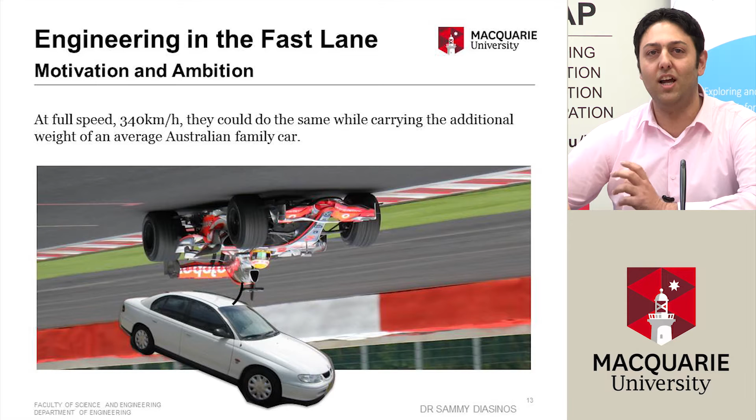I really love this aspect about Formula One, and I wanted to become part of it. From that point on, once I realized that was the case, my goal and all my focus in the future was: how do I get involved in designing Formula One cars? To do that, I needed to become an engineer, and that decision started as early on as high school.

Once I finished high school, I obviously decided to undertake engineering. I studied aerospace engineering because I thought that was most closely aligned with the goal I wanted to undertake. But I also chose a university not just based on the degree it could offer me, but also the extracurricular engineering projects it had available.

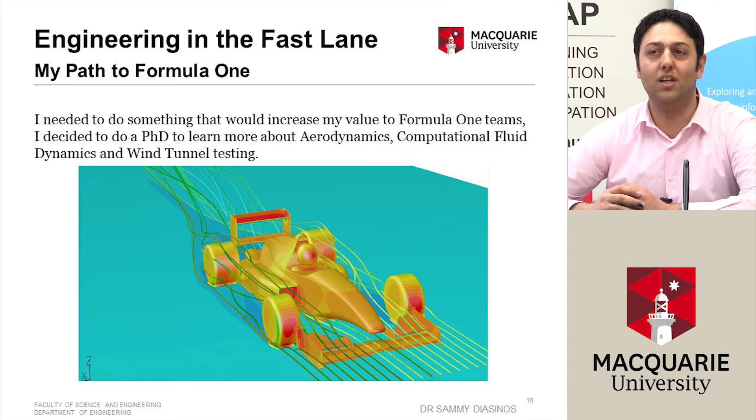So what would I study? A PhD requires you to solve a problem that hasn't been considered before. I found a problem relevant to Formula One cars: I investigated how the performance of a downforce-producing wing varies in the presence of a wheel, and I used CFD as well as wind tunnels to investigate this problem.

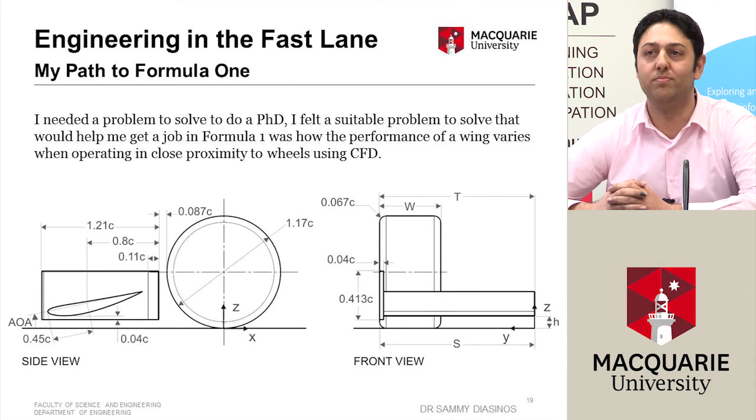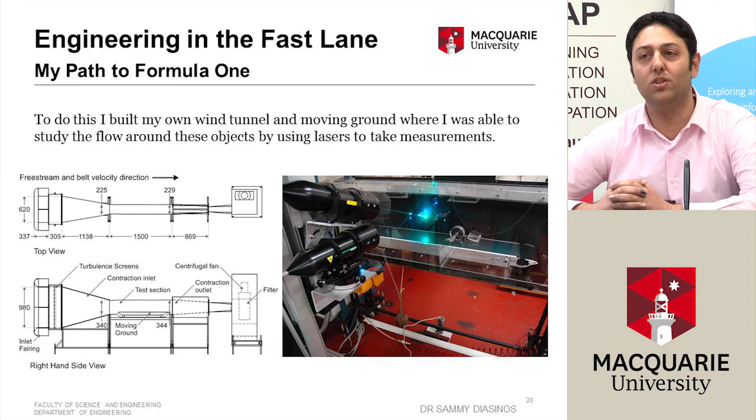Unfortunately, my university at the time didn't have a wind tunnel that would allow me to investigate the problem as I required, so I decided to build and design one. Here's a picture of the wind tunnel schematics that I created and the final product. We also used lasers to take measurements of the airflow behind the wing and the wheel, so we could understand how the flow structures vary around them.

Some of the results here summarize how these flow structures varied. I was the first person able to understand why previous people who studied the same problem were getting different results depending on the geometry they were testing. I found that the span, the amount of overlap the wing had across the wheel, was a significant factor for why all my predecessors were finding different or conflicting results.

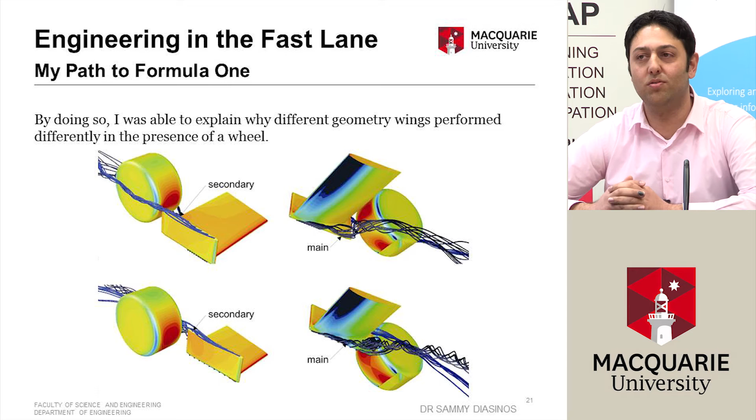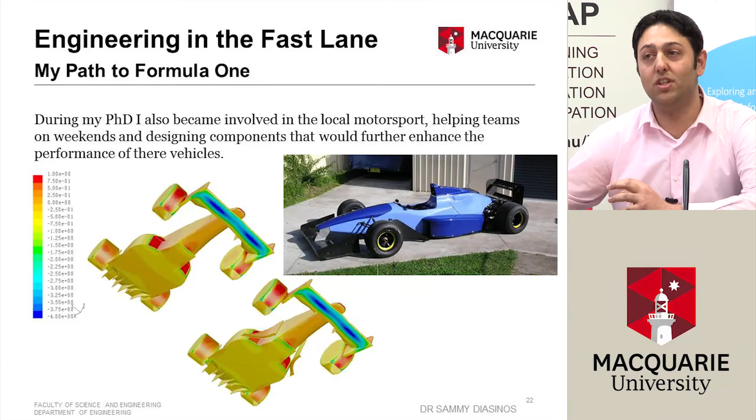During the same time, I also took the opportunity to work with some local motor racing teams, including a Formula 4000 team, very similar cars to Formula 1. I offered my services for free just so I could get experience and understand how to better prepare myself for Formula 1. One of the things I did was design some barge boards, look at how they could improve the performance of the cars, then build them and mount them onto the car for testing on track.

The other fantastic thing about working with the local motor racing industry was it started to generate contacts that could introduce me to people in Formula 1, which was very valuable. I used those contacts to try and convince the Formula 1 teams overseas to collaborate with me and support my research. Unfortunately this was unsuccessful because Formula 1 teams are very secretive—they hold their intellectual property with great value, so that wasn't something they were willing to share with me.

Instead, they invited me to visit them the next time I was in Europe, whenever I had a European passport. Once I had that invitation, I didn't wait—I made plans to go to Europe. In 2004, after obtaining a Greek passport thanks to my Greek heritage, my parents being from Greece, I arranged trips to Europe and visited many motorsport teams, including the Honda and Toyota Formula 1 teams.

I then returned home and continued working on my PhD, and even at this point I felt my dream would never happen. But I kept my contacts overseas up to date with my progress, staying in touch so they knew what I was up to and what stage I was at.

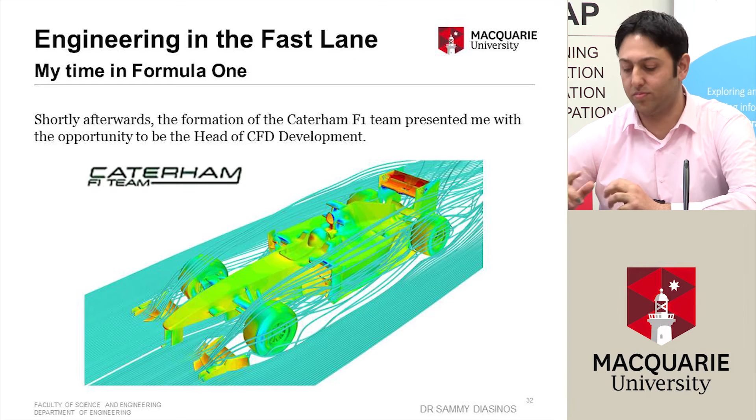Shortly after that, I was scouted to join the Caterham Formula 1 team, which at the time was Lotus, as their head of CFD development. That meant I was responsible for all staff using CFD as a development tool. I was also given the role of Wind Tunnel Special Projects Group leader, investigating problems more complex than just refining the aerodynamics of the car. These included things like the blown exhaust, which impacted both aerodynamics and engine performance, so we had to liaise with the engine department from Renault and the full-scale department, which had to implement the exhaust system safely. It was a very eye-opening and entertaining role.

At all three teams I worked at, a various number of people were used to design, build, and race two cars. At Toyota, it was approximately 1,000 people. At Williams, about 450. At Caterham, the smallest team I worked at, probably no more than 350. But why are so many engineers required to do this, and what could we possibly do all day? There's only two cars racing around the tracks - how much work is there possibly to do?

The reason there's so much work in designing a Formula One car is because every single component is unique to that car and suits its special requirements. As a result, every component is analyzed and refined to achieve the highest performance possible in the time we have. Every component is frequently redesigned and progressively improved to enhance the car's performance at subsequent rounds. This happens non-stop every day of the year, regardless of when races are held, and as a result, the car that starts the season is very unlike the car that finishes it - they almost have no resemblance to each other at all.

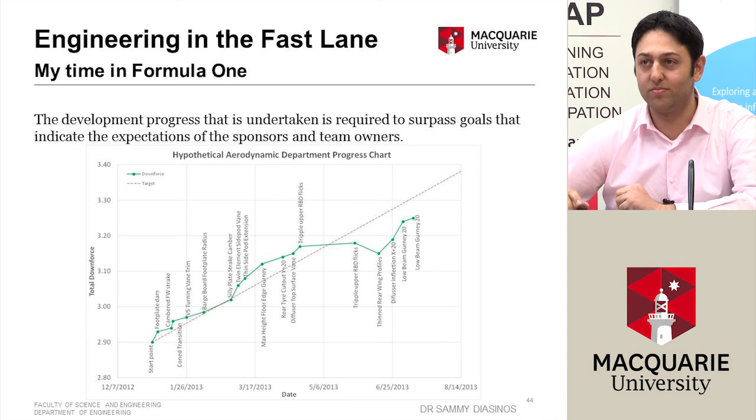Working in Formula One was very exciting, but it did have some negatives. Some of the personal challenges I encountered was that my family is based in Sydney, and as a result, my dream career took me far from my family and friends.

It also means that you can't establish yourself in one location. In the space of 4 years, I lived in Cologne, then Oxford, then Wantage in England, then back to Oxford again. So even if you're based in the factory or design team and not traveling with the race team, there's still some travel associated with working for these teams.

And also, this is probably one because of my own lack of discipline. When you love your job so much, it's actually quite difficult to find an appropriate work-life balance because you're so excited by your job, that's the only thing you can really think of.

There's also professional challenges. Two of the three teams I worked for previously don't even exist anymore for financial reasons, so job security is definitely one of the issues associated with this role. Especially with the smaller teams, it's often unsure if they're going to be around soon after.

Another professional challenge was that the motivation for research was not always governed by the engineer's perception of what was necessary, but sometimes what the stakeholders and team owners thought was necessary. And the stakeholders and team owners, not being engineers, will probably feel that what the winning team has is what is best to have, and that is what they will guide your research to be.

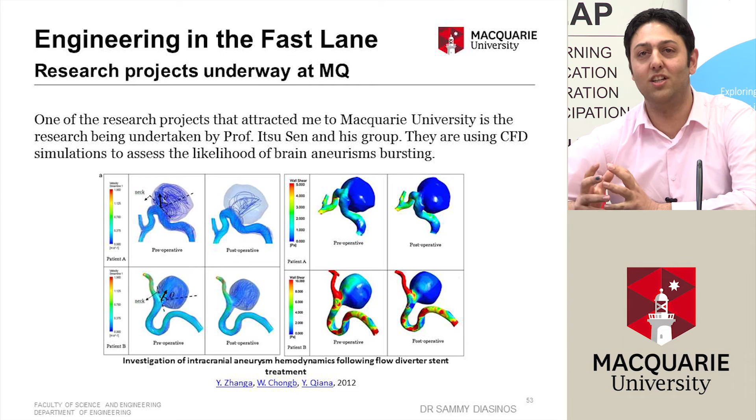CFD is the exact same software that I was using to design wings for a car or a plane, and this exact same software is now being used in a biomedical application. That was very exciting for me, that you can translate that knowledge into a completely different field.

One of the investigations we're currently undertaking is understanding how the aerodynamics of a vehicle traveling through a corner work. This isn't only relevant to racing cars or conventional cars, but also to submarines. Any object which travels on a tight radius relative to its length experiences a different flow at the front and the rear. Unfortunately, at the moment there's no experimental technique to test for such a condition, and this is one of the problems we're trying to solve currently with our research.

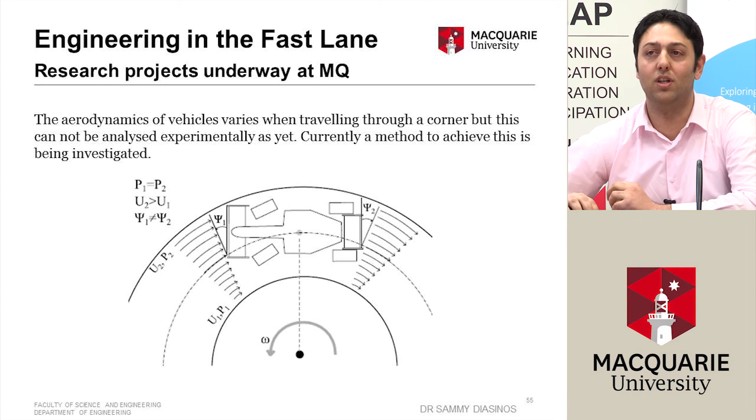All vehicles, or most vehicles and cars, have wheels, and the aerodynamics of a wheel has a huge impact on the drag and the fuel consumption that a car has. For this reason, we're investigating the aerodynamics specifically of wheels, and trying to understand how we can reduce the drag of wheels to better improve the fuel efficiency of cars.

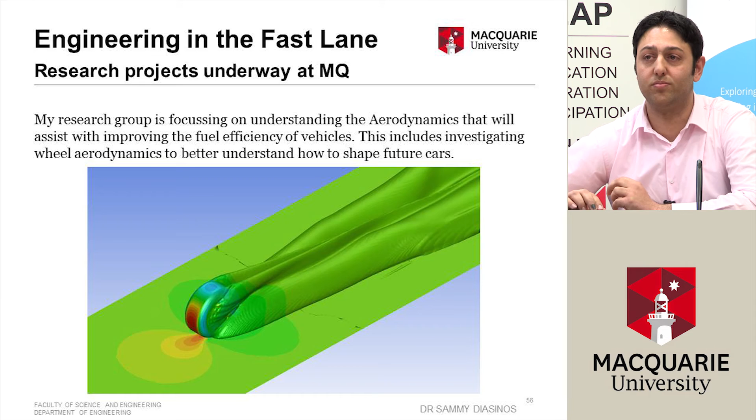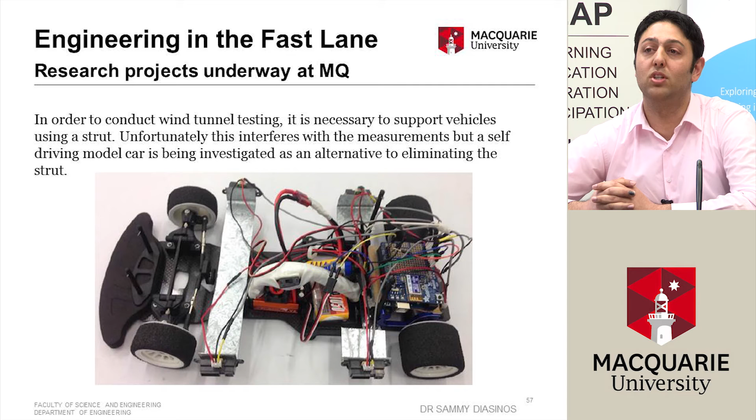One other aspect which is very large at the moment in the automotive industry is self-driving cars. At Macquarie University we're looking at the possibility of making a self-driving wind tunnel model, a car which can drive itself in a wind tunnel, so that we can reduce some of the reasons for having poor correlation between the wind tunnel and the road. This car is designed so that it can drive itself on a conveyor belt inside the wind tunnel and measure the forces it experiences when it drives against the air.

Another reason for introducing self-driving cars is that in the future it's anticipated that on highways, self-driving cars will be able to drive very closely to each other, and by doing so reduce their drag further and improve fuel consumption. Unfortunately, at this stage it's not really understood how much more a car can improve its fuel consumption by following another car closely, and that's something we're investigating here at Macquarie University as well: how does the drag of a car behind or in front of another change when they are traveling in close formation?

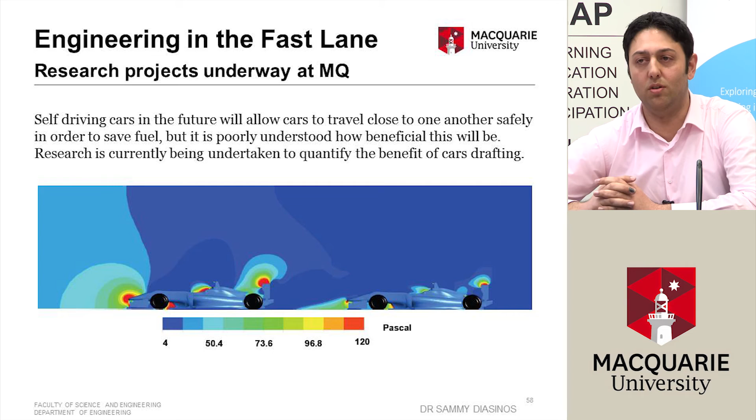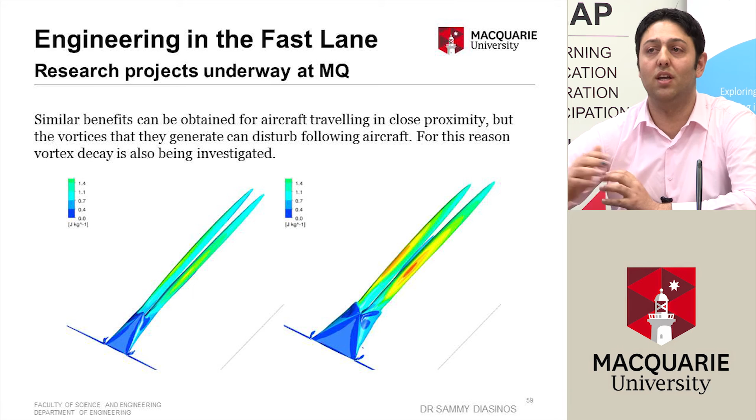There is also discussion about aircraft using the same technique to reduce their fuel consumption, but aircraft generate vortices, which are like little tornadoes off their wingtips, which can adversely affect the performance or lift characteristics of an aircraft behind it. One of the investigations my PhD students are currently undertaking is how vortex decay can be predicted, how we can understand what a vortex decay will be, and how we can control it, because these vortices can affect aircraft which are further down from the existing aircraft.

Part of being an academic is teaching, and I don't see it as teaching, I see it as preparing students for achieving their future goals. How do I prepare students for their careers in the fast lane?

The most exciting project we have going on at the moment at Macquarie University is the MQ Speed project. It's an extracurricular engineering project which will hopefully allow students to apply their engineering knowledge in a dynamic and exciting project.

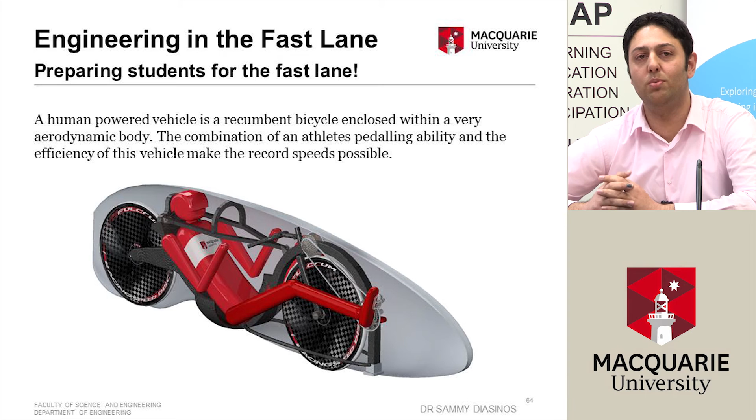Thus far, the students have designed a simulator to help improve the understanding of an athlete's ability to generate the power that's required, and also to help the students understand how changes to the vehicle design will affect the final outcome of the speed that the rider will achieve.

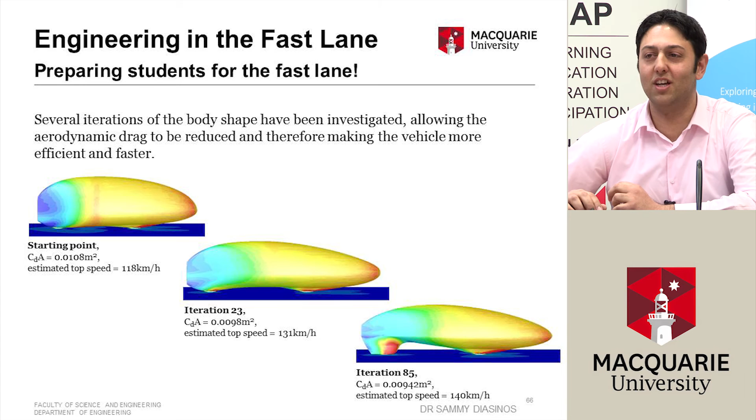There have also been CFD simulations undertaken investigating the aerodynamic shape of the vehicle. As you can see from the left where the team started, they designed a vehicle they estimated could achieve 118 kilometers an hour. But after some aerodynamic refinement, they believe they now have a vehicle that can achieve approximately 140 kilometers per hour. If that's correct, that's great news, because it's a large step above the world record. I'm sure there are some things that haven't been considered just yet.

There's also been design work for internal composite structures, which is what you see here, the internal frame, made out of composites for a number of reasons. First, so that it easily follows the shape of the vehicle being designed. Also, to keep it light and stiff. And finally, and most importantly, to keep the athlete, the occupant, safe in the unlikely event of an accident or a crash.

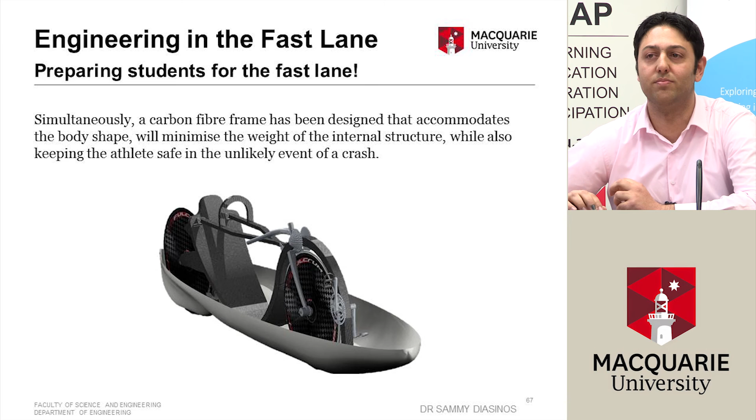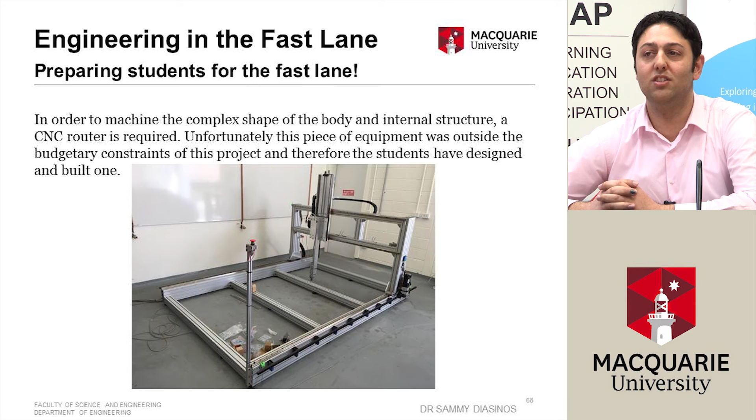In order to manufacture composites, the team needs a CNC mill to make the molds they require. Unfortunately, the team doesn't have the funds to purchase a CNC mill of the scale they need, so they undertook the activity of designing and building a CNC router, which is what you can see here, which they're nearly close to completing.

In conclusion, for those that are passionate, enthusiastic, and driven to become engineers, there are lots of exciting projects that exist all around the world. I don't expect students to all be interested in Formula One, but I hope they all have their own enthusiasm, their own passion, and their own reason for wanting to become an engineer.

But the first step is to understand what that is. What excites you, what motivates you, and what's going to drive you to study, to work every day. If you love your job, it's not going to feel like work, it's going to feel like fun.

Once you've established what that is, make a plan that will help you achieve your ambition. This should include what education is required to do that, but also how to get as much experience as possible along the way to prepare yourself for an opportunity when it presents itself.

And finally, do not underestimate the value of contacts. Exciting engineering careers are usually very competitive, and for this reason you have to find the right people to demonstrate your ability to. Once you've demonstrated your ability to the appropriate people, they will generate opportunities for you. All you have to do is be ready when those opportunities arise.

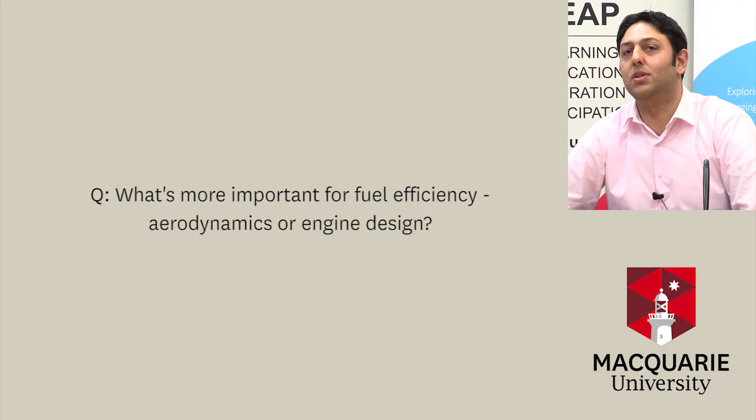That involved a lot of sleepless nights, that's one thing for sure. But it introduced me to a lot of the aerodynamics concepts and structures concepts that you need for designing items such as vehicles, such as aircraft or Formula One cars.

The structures and the aerodynamics are specific to that, which are unique. If you are not studying mechanical engineering, there's probably a lot more focus on composite design, a lot more focus on fluid mechanics, a lot more focus on control systems. So how do we keep an aircraft stable in the air? How do we keep it light in the air? That's why we're studying composites. And how do we generate the lift, which is why we're studying aerodynamics. So I think that's some of the unique features of an aerospace engineering degree.

Now, I think the thing I would add is that aerospace engineering degrees are very exciting, very interesting. The opportunities for aerospace engineers in Australia, though, are very limited. If that's a degree you plan on undertaking, it's something you would have to be prepared to travel overseas in order to forge a career in that path. Whereas mechanical engineering is probably a lot more open and possible locally as well.